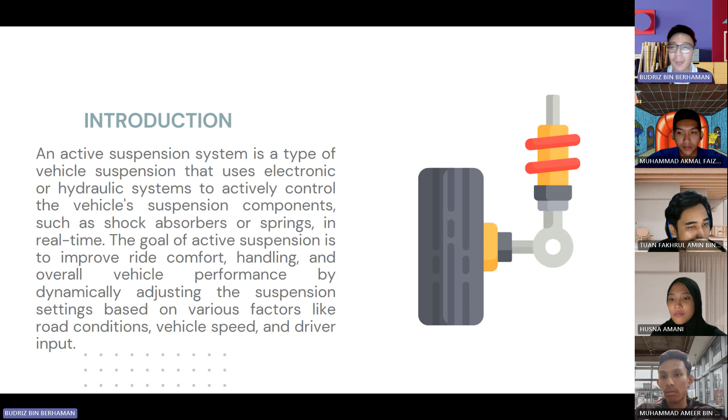I am going to summarize the literature review that me and my group mates have done.

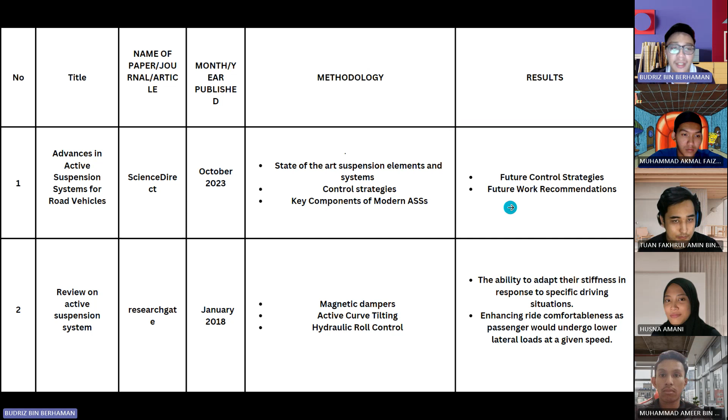The first one is Advances in Active Suspension System for Road Vehicles. The second one is Review on Active Suspension System. The third one is Control of an Active Suspension System Based on Long Short-Term Memory (LSTM) Learning.

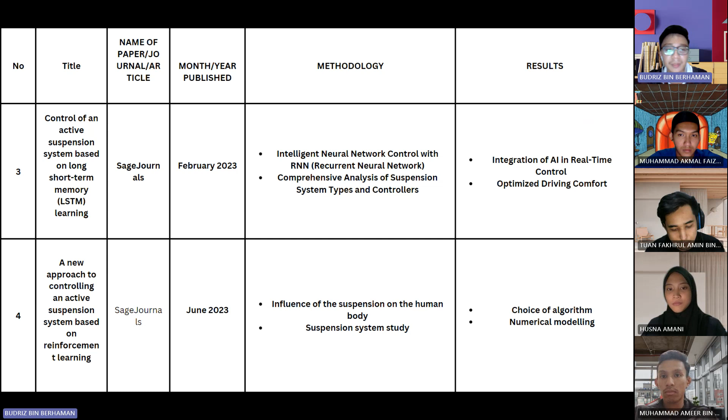The fourth one is A New Approach to Controlling an Active Suspension System Based on Reinforcement Learning. And lastly, Active Vehicle Suspension with Anti-Roll System Based on Advanced Sliding Mode Controller.

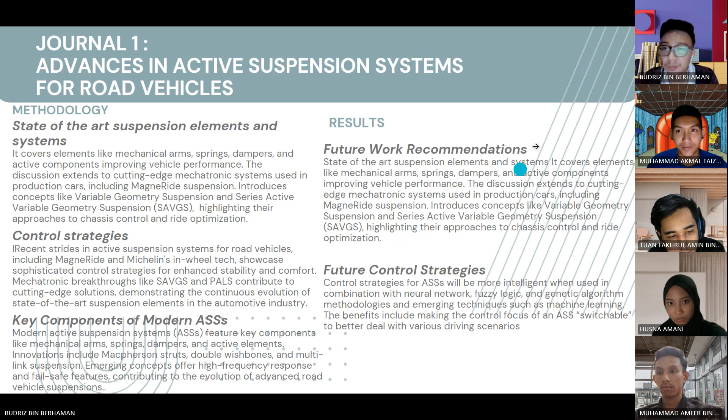Thank you, Akmal. So I will continue for the Journal 2, which is review on active suspension system. From this article, I obtained 3 methodologies. Number 1 is magnetic dampers. General Motors created magnetic ride control dampers that adjust their stiffness by changing electric current in a special fluid.

Number 2 is active curve tilting. This technology was introduced by Mercedes-Benz in 2015, seen in the S65 AMG Coupe, which uses sensors and cameras to detect corners. The car's air suspension system then tilts the body towards the turn, not to enhance cornering, but to make the ride more comfortable.

So the last one is hydraulic roll control. In contrast to typical suspensions using steel anti-roll bars to control body roll, this hydraulic system moves fluid to the opposite side of the vehicle. It functions like a large anti-roll bar, but without a physical one, and it adjusts to driving conditions.

From this methodology, it's able to adapt their stiffness in response to specific driving situations. This implies that depending on how you drive, some car suspension systems may adjust how stiff or soft they are. For example, they can be harder for improved stability when navigating curves or on uneven terrain, and softer for a smoother ride on highways.

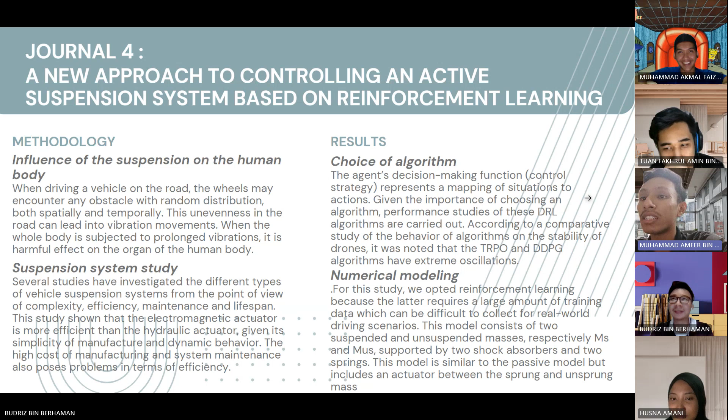So basically, numerical modeling is to create and calculate the calculations for the active suspension system. That's all from me. Thank you.

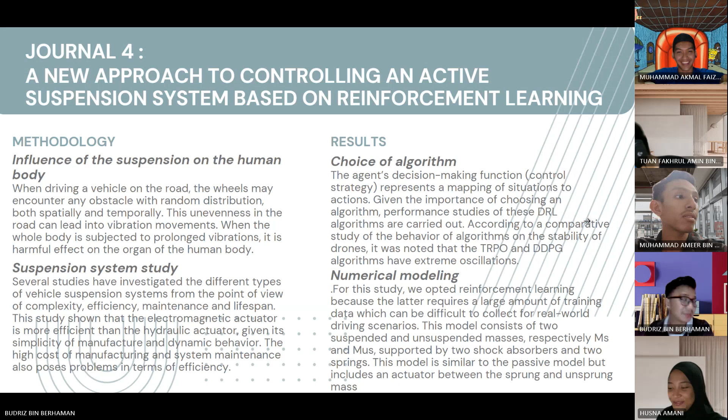Hello, my name is Fakhrul and I will be presenting my Journal 5 regarding active vehicle suspension with anti-roll system based on advanced sliding mode controller.

For methodology, referring to the article, the first one is the vibration isolation system, proposing an intelligent vibration isolation system featuring the advanced sliding mode controller for energy efficient vehicle suspensions. The article advocates task division, anti-roll bar utilization, and quality preservation without heightened energy consumption. The ASMC successfully minimized both roll and vibration. Research may extend to a comprehensive vehicle suspension model.

The second one is suspension design and control algorithm, examining the application of anti-roll bars in different vehicle segments to control body roll. The text delves into solutions for designing and implementing control algorithms for specialized vehicles like high mobility, multi-purpose wheeled vehicles. It highlights the positive effect of reducing body roll on aspects such as handling, traction, grip, and safety.